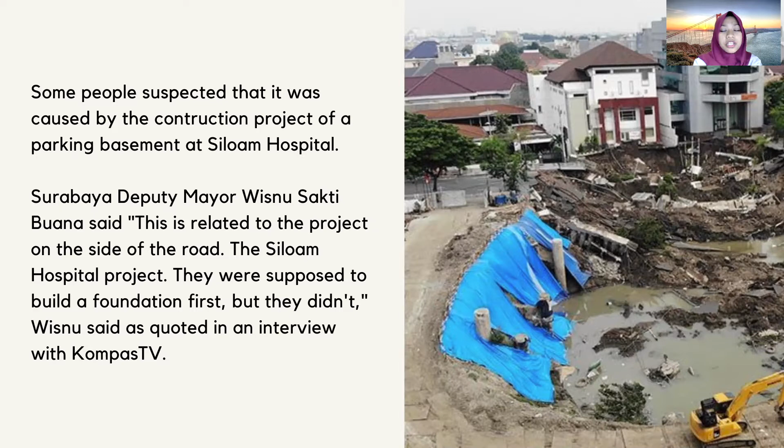However, some people suspect that it was caused by the construction project of a parking basement at Siloam Hospital. Surabaya Deputy Mayor Wisnu Sakti Buana, in an interview with Kompas TV, said this is related to the project on the side of the road, the Siloam Hospital. They were supposed to build a foundation first, but they didn't.

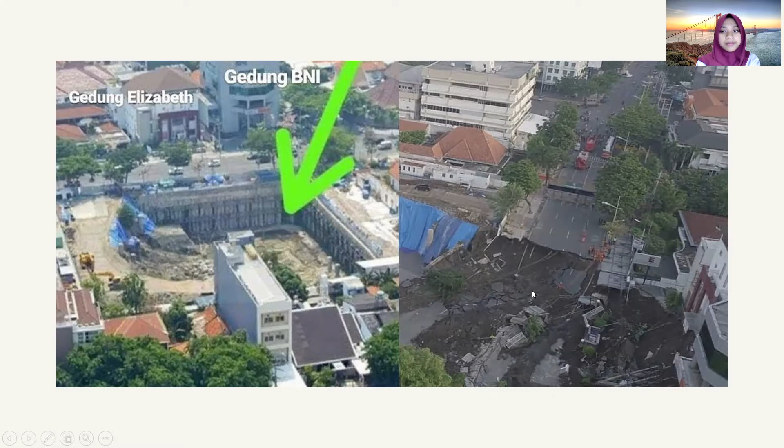These are the before and after pictures of the giant sinkhole. As we can see, on the left side is the picture before the incident occurred. Along this road, there are two buildings, the BNI building and the Elizabeth building, as well as the construction of the Siloam Hospital. This arrow shows the construction of a basement at Siloam Hospital. And on the right side is the picture after the incident occurred. Okay, the next explanation will be delivered by my partner, Melinda.

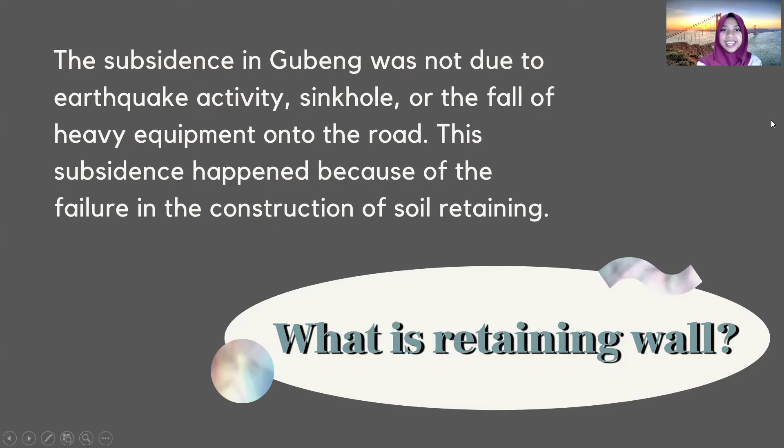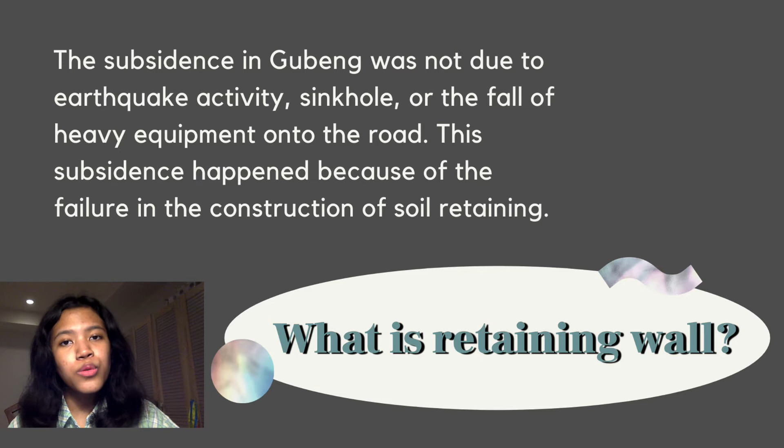Thank you. The subsidence in Gubeng was not due to earthquake activity, sinkhole, or the fall of heavy equipment onto the road. This subsidence happened because of the failure in the construction of the soil retaining or retaining wall. So, what is a retaining wall? A retaining wall is a structure designed and constructed to resist the lateral pressure of soil when there is a desired change in ground elevation that exceeds the angle of repose of the soil. Retaining walls are used for supporting soil laterally so that it can be retained at different levels on the two sides.

Basically, a retaining wall has several functions. 1. Blocking the lateral pressure of active soil, which could potentially cause a lateral collapse in the soil, such as a landslide. 2. Resisting the lateral pressure of water that could potentially cause a lateral collapse caused by massive water pressure. 3. Preventing lateral seepage due to high elevation of the groundwater.

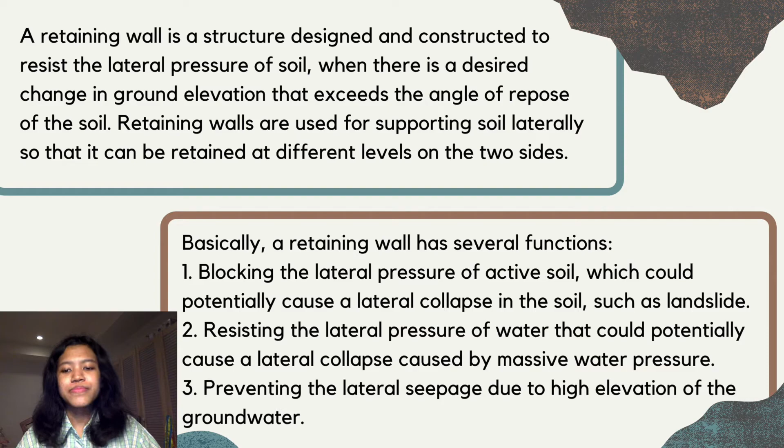I will explain the types of retaining walls that are commonly used. First, there is the gravity retaining wall. A gravity retaining wall is a wall which uses its own weight to resist the lateral earth pressures. The main force acting on a gravity retaining wall is the vertical force from the weight of the wall. Next, there are cantilever retaining walls. Cantilever retaining walls are usually of reinforced concrete and work on the principle of leverage. It has a much thinner stem and utilizes the weight of the backfill soil to provide most of the resistance to sliding and overturning.

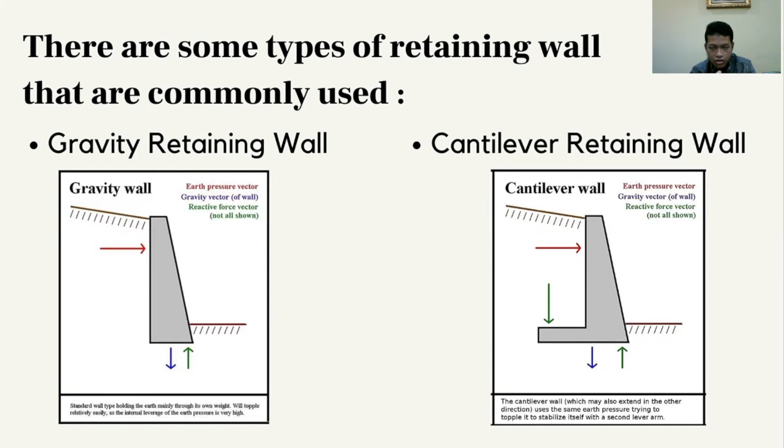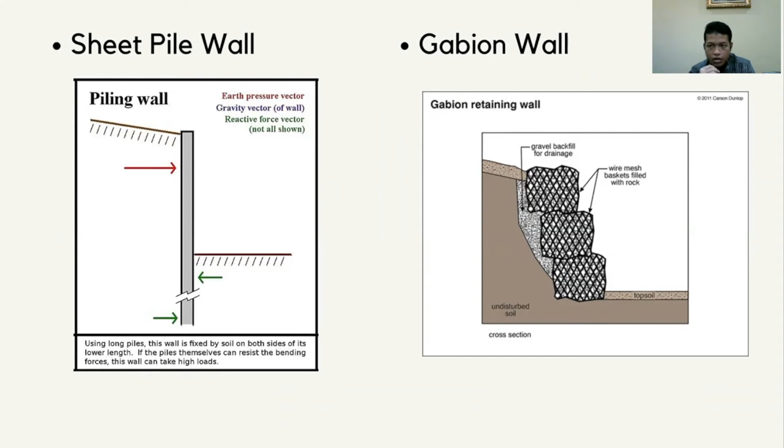Next, there is a sheet pile wall. Sheet pile walls are retaining walls constructed to retain water or any other fill material. Next, there is a gabion wall. A gabion wall is a retaining wall made of stacked stone-filled gabions tied together with wire. Gabion walls are usually battered or stacked back with the slope rather than stacked vertically. Next, there is a block concrete wall. Block walls are structures containing standard concrete blocks that can take on various shapes and sizes.

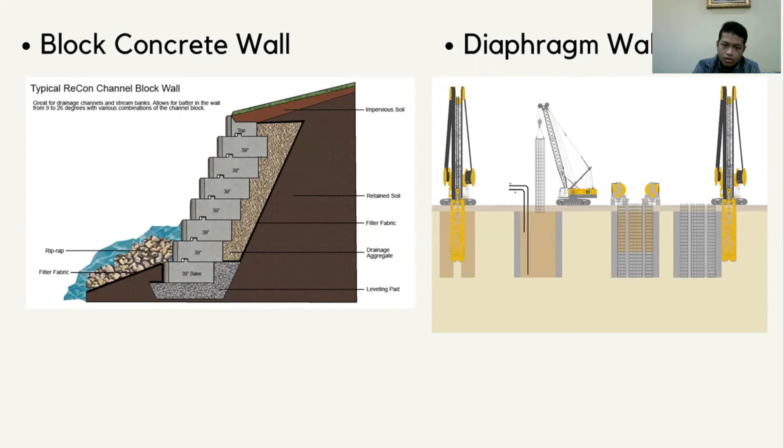Next, there is a diaphragm wall. A diaphragm wall is a structural concrete wall constructed in a deep trench excavation, either cast in situ or using precast concrete components. Besides that, there are still some other types of retaining wall. There are contiguous pile, soldier pile, and so on.

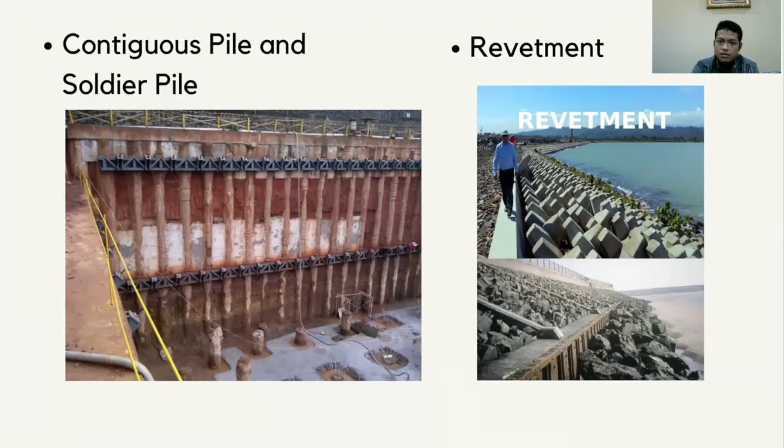In the case of the sinkhole in Gubeng, the retaining wall used on the Siloam Hospital project was soldier pile and contiguous pile with a bottom-up construction system. The contiguous pile and soldier pile is a retaining wall that holds active soil lateral pressure and underground construction like the basement of a building. They are also usually combined with an anchor system to increase the support against the active lateral pressure of the soil and have another function to break underground water flow. The contiguous pile and soldier pile is made with a bored pile system of reinforced concrete as well as using a steel profile, combined with bentonite and strung together to form a dense retaining wall.

Generally, the term retaining wall failure doesn't refer to total failure or collapse, but rather describes signs and indications by which failure possibilities and wall instability could be predicted and can be saved if dealt with properly. There are some common causes of retaining wall failures, such as improper reinforcement placement, saturated backfill, weep holes that don't weep, design errors, calculation errors, unanticipated loads, mistakes in utilizing software, detailing errors, foundation issues, inadequate specifications and notes, shoddy construction, and the last one is retaining wall age.